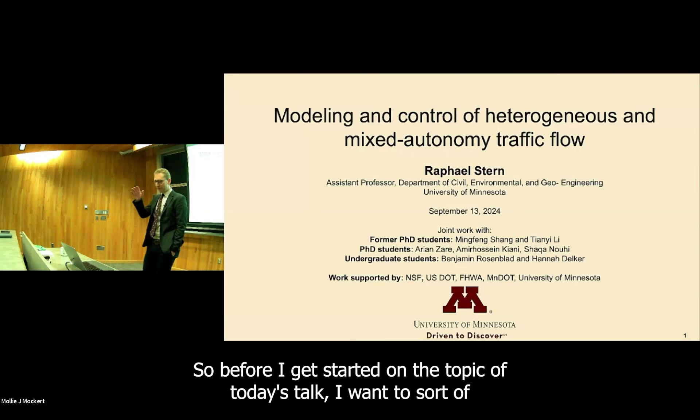Before I get started on the topic of today's talk, I want to place my work generally in a broader context. I'm going to talk about one of the projects I've been working on here at the University of Minnesota, but the work that I do all kind of revolves around this central question of how do you use data to inform the control and management of transportation systems. There's a whole bunch of new data sources coming online, and we can use these to better manage the transportation infrastructure that we have.

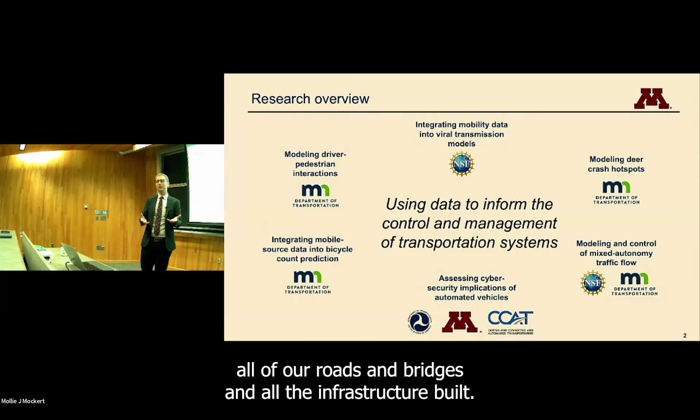A large part of my philosophy about this is we have spent decades and decades and billions of dollars building infrastructure, and saying something like automated vehicles is going to totally change the infrastructure that we need is unfortunate, because I just don't think it's going to happen if it requires us to rebuild all of our roads and bridges and all the infrastructure we've built. So a large part of the work that I do looks at what do we have, how do we take data to improve how we're managing what we have, and what maybe smaller updates do we need to make.

That includes work with vulnerable road users like bicyclists and pedestrians. During COVID, I got really interested in mobility data as a whole and how that influences viral spread modeling. A lot of stuff with deer, actually not that much stuff with deer, but people seem to be interested in it. And what I want to talk about today is what might happen when we have automated vehicles. I think we are both closer and further from having automated vehicles than you may think we are. I'll talk about what I mean by that.

So automated vehicles have had a lot of hype over the last several decades, more so in the last maybe decade or so. And there's a lot of different aspects of how automated vehicles might totally change the way we think about transportation. I want to talk about a couple of these - this is not what I want to talk about today, but I think it's important to at least set the stage and understand how automated vehicles have the potential to really transform the way we think about transportation and mobility.

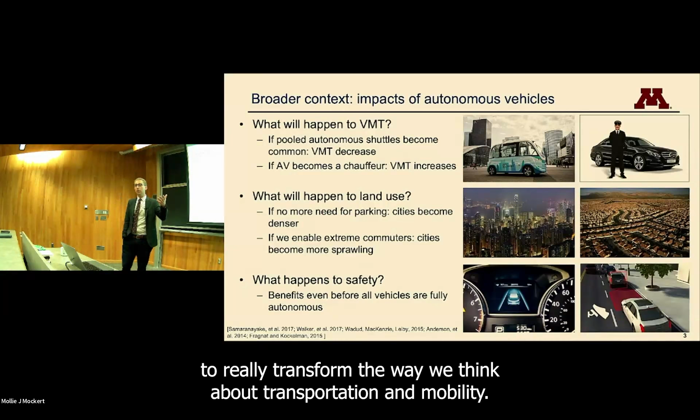The first question that's out there is what will happen to vehicle miles traveled? VMT is a commonly used metric that traffic engineers use to decide how to allocate resources in terms of road repair, road improvement, et cetera. And there's different scenarios that could play out depending on how automated vehicles are introduced.

On the one hand, there's a lot of work. We've seen some Warren lectures here presented on pooled automated shuttles. If I had driven this morning instead of biking, there were probably other people coming up from South Minneapolis at a similar time. We could have potentially pooled a ride, and if we didn't have to worry about a driver, a shared shuttle could pick us up and drop us both off here, taking what would have been 2 trips and reducing it to 1. That's a reduction of vehicle miles traveled.

The other way to think about an automated vehicle is it's effectively a chauffeur. So if at 11 o'clock at night you want to go get some food, you can just get in the automated vehicle and not worry about being sleepy. Actually, why even get in the car? Just have the car do the work, drive, come back, and now you might have ghost trips occurring without a human in the car. You effectively reduce the cost to travel and the cost of time, and you could see a big increase in vehicle miles traveled. Automated vehicles also have the potential to change how we think about land use.

University of Minnesota is an urban campus. Real estate here isn't super expensive, but it's reasonably expensive. If you look at a satellite photo of the campus, you'll notice huge parts of it are surface parking, used just to park cars. With automated vehicles, we could potentially reduce some of that because those cars might not need to park — they could drop you off at work or class and then go pick up someone else. We could use that land to build more dorms, more graduate student housing.

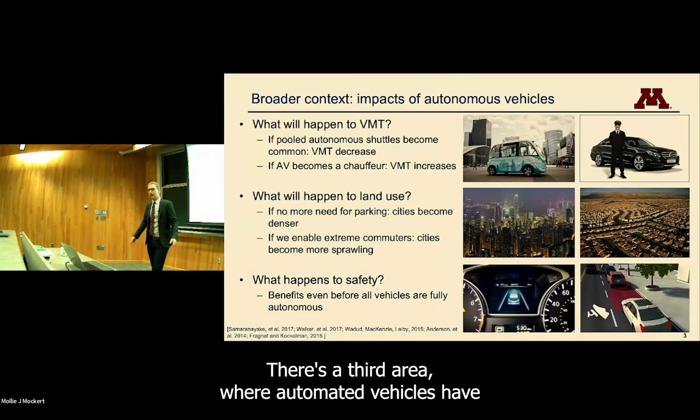There's a third area where automated vehicles have the potential to make real change, and that is safety. Again, there are different scenarios. If you look at the automated vehicles we have now, there are suggestions they might not actually be as reliable as human drivers right now, but there's also potential in the long run for them to be much more reliable, because humans text, humans drink and drive — automated vehicles don't do any of that.

Okay, so those are all the things I'm not going to talk about. But I think they're important to keep in mind because they really set the stage for the entire conversation about how vehicle automation can impact how we think about transportation.

What I want to think about is how increased vehicle autonomy will impact traffic flow. This is the topic I'm really passionate about, and it goes back to that central question that guides a lot of what I've done here. Things might be different — what does that mean for how we manage the infrastructure?

What I'm really interested in — I love traffic jams, I hate being in them, but I love them — is something called phantom traffic jams. These are real traffic jams that occur for no good reason, or no apparent reason, is probably the better way to put it.

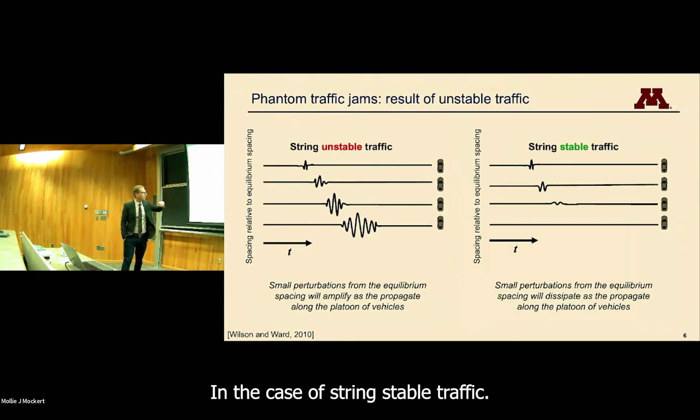Asymptotic stability might refer to what happens to that vehicle over time, but string stability refers to what happens to that perturbation. The vehicle behind it is going to have to hit the brakes too. The question of string stability is, does that perturbation amplify to subsequent vehicles, in the case of string unstable traffic, or does it dissipate to subsequent vehicles, in the case of string stable traffic? This is the key to whether or not you're going to have those instabilities, those phantom jams arise, is this string instability.

And you see these things sort of arise out of the blue. They grow, some of them split, they have a life of their own. Some of them merge, you can see some of them merge. They have really interesting dynamics of their own. It's sort of like looking at zebra stripes or something and trying to make sense of it. What's going on here? Okay, so this is what traffic looks like in the wild.

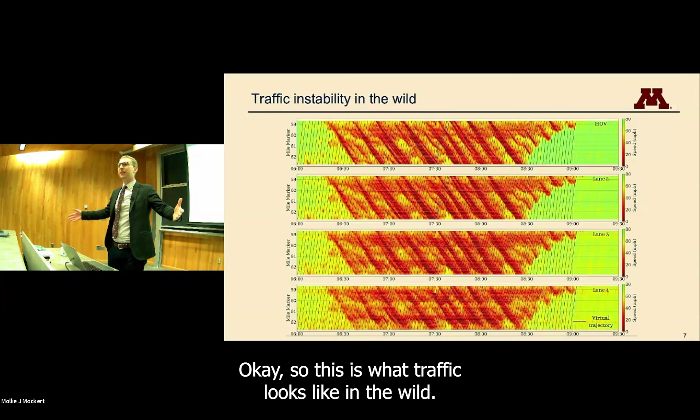When I spoke here, I think it was 6.5 years ago, I had a result I was super proud to present, and I want to show it now because I think it sets the stage for a lot of what I've done since. The question was, think back to that ring road experiment from Japan, 22 cars on a circular ring, they're all driving, chaos ensues. What happens if we start to have a small number of those vehicles where we can control how they drive? That's the central question here. Imagine you can make some of those vehicles drive better.

Now at this point, we've activated the autonomous controller on that car. That car drives differently. The drivers in the other cars have no idea what's going on, but that one car driving better forces everyone else to drive better, which is kind of cool, right? Think about what you could do if you drove better.

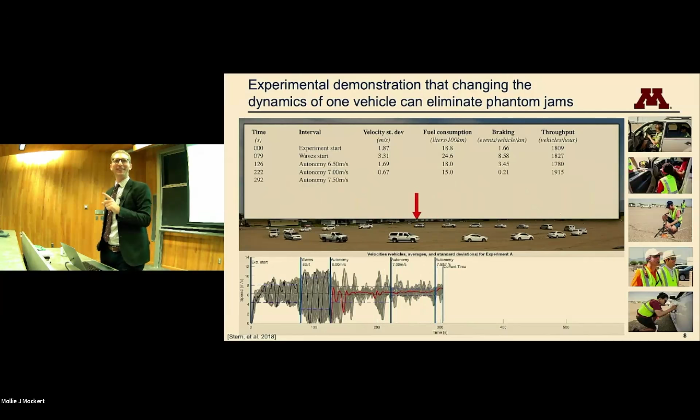When you see something like that, that's a wave, that's a slowdown. You can see really nicely at the beginning, we have these stop and go waves, these phantom jams that arise. There's no bottleneck there, right? Those are just straight up phantom jams. But relatively quickly, we activate the controller and we see smooth traffic.

We measured data off each vehicle. We saw a huge reduction in fuel consumption, a slight increase in throughput, because instead of slowing and speeding up, we see maybe a 15% or so increase in throughput. Okay, so that was the result that I was super excited to share.

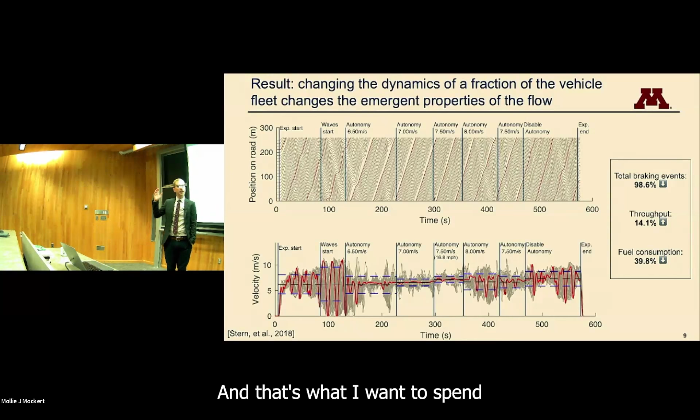The question is, how realistic is this? And that's what I want to spend the rest of today talking about, is can we actually do this? And there's an important thing that we need to all be on the same page about, and that is that not all automated vehicles are the same.

There's different levels of automation, and each level of automation means a different thing. So the Society of Automotive Engineers defines 5 different levels of automation. I guess 6, because there's level 0, no automation. That's what I personally drive.

So in no automation, who's steering and accelerating? That's the human driver. Monitoring the environment, that's the human driver. If something goes wrong, the human driver needs to slam on the brakes or veer to avoid a crash. There's no robot on the car.

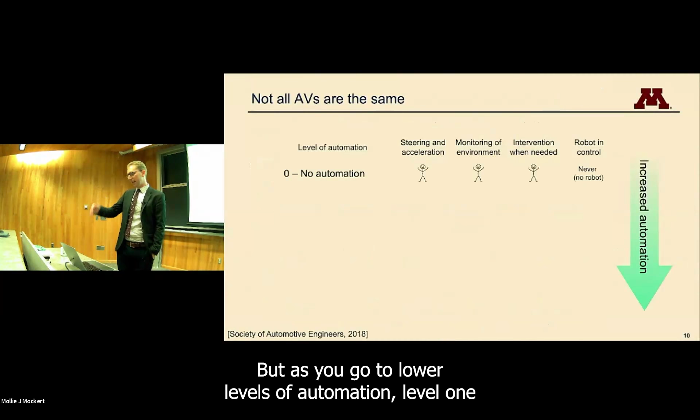But as you go to lower levels of automation, level 1, driver assistance, these are features that you might be familiar with. We start to take some of those driving tasks from the vehicle and hand them off, take them from the human and hand them off to the vehicle.

And as we go up to higher levels of automation, level 2 partial automation, conditional automation, high automation, and finally up to level 5 full automation, we're seeing more and more of these driving tasks in more and more driving contexts. Some of these might only be on pre-mapped freeways, whereas being able to do this in all driving domains are handed over from the driver to the car.

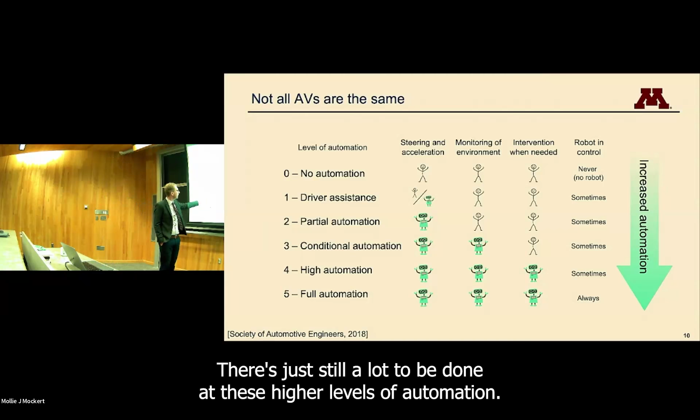And so those results that I showed, they might be feasible if we're somewhere here, right? 3, 4, maybe 5. The reality is, what we've got, at least for the foreseeable future... I mean, a few months ago, every week, another autonomous car company went bankrupt. There's just still a lot to be done at these higher levels of automation. What we have for the foreseeable future is these lower levels of automation.

So I want to start there. One feature that I'm particularly interested in, because it does exactly what we want it to do in terms of controlling the flow of traffic, is it changes the way that individual vehicles drive, and that's adaptive cruise control. Remember back to that video on the ring, what we really saw there was if you change the way a small number of vehicles drive, you change the way the whole flow behaves. You change the emergent properties of the dynamics of that whole traffic flow.

And adaptive cruise control used to be a luxury feature, but now most new cars have it. Many new cars have it. I dare say most new cars have it.

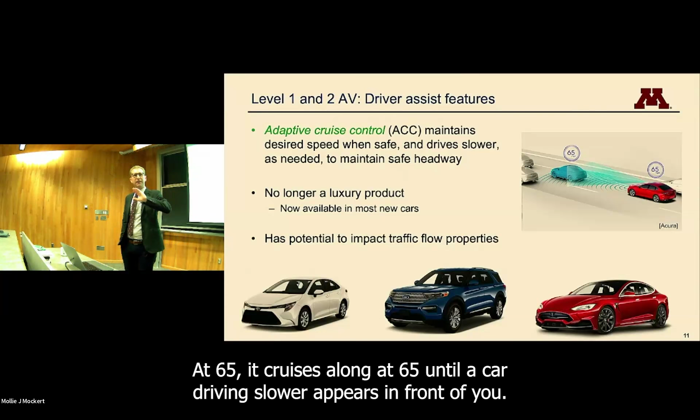What it is, it's like a traditional cruise control, but it uses a radar to also maintain a safe spacing. So you want to drive at 65 miles per hour, you set your adaptive cruise control at 65. It cruises along at 65 until a car driving slower appears in front of you. It'll slow down to avoid a collision. And then as soon as that car changes lanes or speeds up, your adaptive cruise controller will speed back up.

That is exactly what we want, right? We want to be able to control something like that. Now, if you look at the literature and you ask, okay, but are these things string stable? There's literature going back to from before I was born, right around when I was born, early 90s, that says a resounding yes. Adaptive cruise controllers can be string stable, end of story.

But it turns out that if you actually look at the way these systems work, this is in theory, but in practice there's a slightly different story. That's what I want to investigate right now. This is some work that I did early on while I was here.

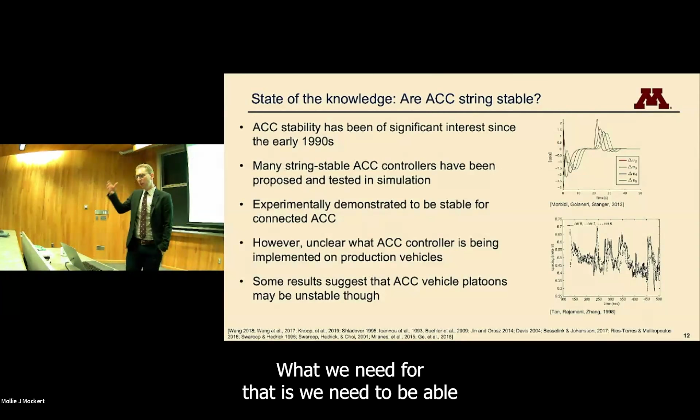So in order to analyze what these systems look like with respect to string stability, we first need to be able to characterize the string stability of a driving system. What we need is to represent that system somehow. I'm going to use something called car following models, or microscopic models. These are ordinary differential equations that describe the acceleration of a vehicle as a function of the spacing with respect to the vehicle in front, the speed it's traveling at, and the relative speed between the two vehicles. This is a common assumption made back to the mid-50s with some of the first car following models out of GM, describing the dynamics of a vehicle as an ODE with this state.

So if we have one of these, the question of string stability is: a platoon of these vehicles, or a group of them driving at equilibrium, what happens to small perturbations? We have that same equilibrium as before, zero acceleration, same speed, same spacing, and we introduce a small perturbation. The question is what happens to that perturbation through the dynamics. So we can couple these ODEs and watch what happens.

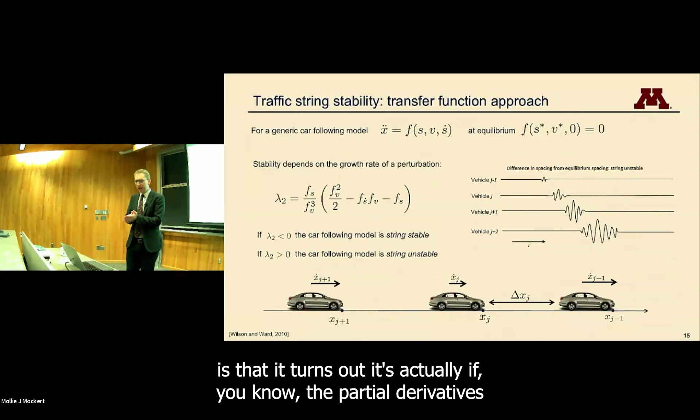The key result I want to get to is that if you know the partial derivatives of the car following model, that ordinary differential equation, you can easily characterize whether or not that vehicle is string stable. You come up with this lambda 2 - happy to go into details on what that is, it's the curvature of the Bode plot. The important thing is it depends only on the partial derivatives of the model, so if you know your model, it's calculus, but you can easily derive those partial derivatives and get your lambda 2.

If lambda 2 is less than 0, we're going to see dissipating behavior - that's a string stable vehicle, it tends to smooth traffic waves. If lambda 2 is greater than 0, it's string unstable, and it tends to amplify those waves.

Okay, so now we have a model, and we have a tool to analyze that model. What we need is data, and I think this is what Dr. Davis was getting at before - we need to collect data. The goal here is to observe what these vehicles behave like.

Now you might say, hey, car companies built that, they know how it behaves. So two things. First, they're never going to tell me - I tried, they won't tell me. Second, and perhaps more importantly, they know how they think they built it.

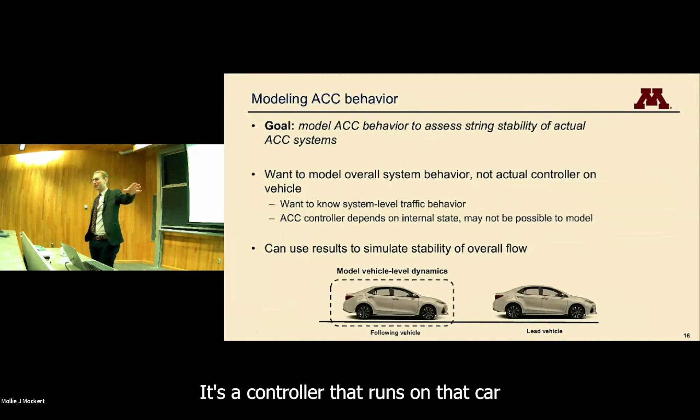They have some relatively straightforward controller - for anyone who knows something about controls, it's a PID controller that runs on the car, and then runs through this highly nonlinear system, which includes a gearbox, transmission, an engine, all sorts of different components. Add to that all sorts of different external variables, such as wind speed, even things like air temperature and humidity affect how that engine behaves. So you'd need a thousand-dimensional model to accurately assess this, and you'd need the knowledge from the car company, which again, they're not going to give you.

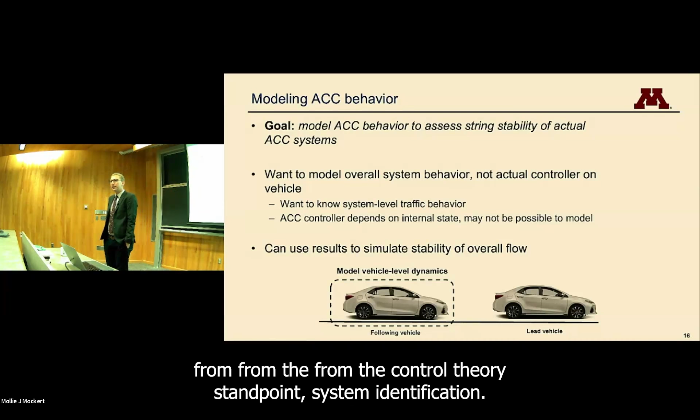So what I want to do is think of this more as a system identification problem - sort of think of it from the control theory standpoint. I want to see: I give this an input, this car in front of it brakes, how does this respond? I want to build this as a black box in the form of those car following models, because I just spent three minutes telling you how I can nicely analyze those models for string stability. So the model I'm going to use is pretty straightforward.

I'll talk in more detail about variants of this and variations we've developed here, but the basic model I want to use is an optimal velocity, relative velocity model.

There's two terms to this model. The first term is, who here learned the 2-second rule in driver's ed? This is follow the tau second rule: stay tau seconds behind the vehicle in front of you. So if you're going faster, increase that spacing.

The second term is sort of a relaxation toward the leader velocity. If the vehicle in front of you starts to brake, you don't want to overshoot. You want to be slightly more reactive.

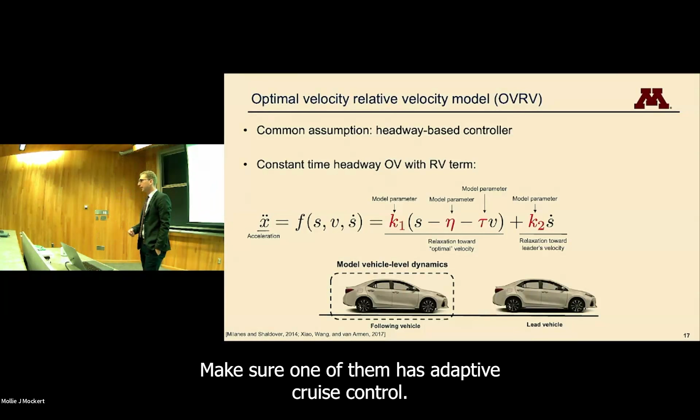The experimental setup here is really pretty simple. Get two cars, make sure one of them has adaptive cruise control, get high accuracy GPS sensors, mount those on each car, drive, have the vehicle in front brake, the vehicle in back follows with ACC on, record the signal for each of those. You get the spacing, you get the speed of each, you get the relative speed, and you're in business. Did this with a whole bunch of different cars, just to give you a sense of what some of this looks like.

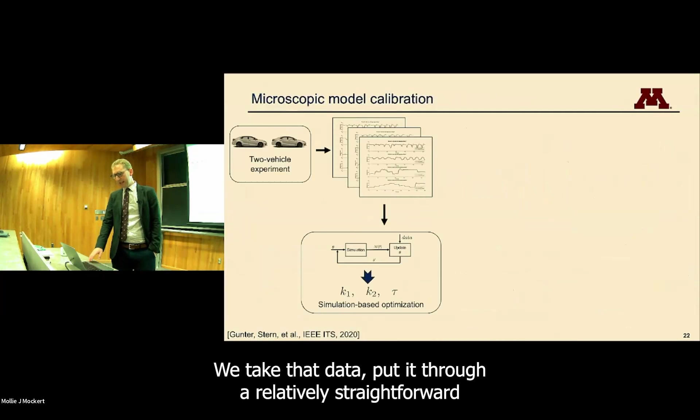So in summary, we've got a 2-vehicle experiment that gives us data. We take that data, put it through a relatively straightforward optimization routine to find the best fit model parameters that make that model I showed you, remember that 2-second rule or tau second rule model, look like each of those vehicles, each of those 7 vehicles.

We get values, we test them. Most of these cars, if you have one of these systems, you'll know that there's generally a close following spacing and different user settings. Some cars have 2 settings, I've seen some cars have 7 settings. I don't know who needs that much specificity in terms of how far they follow, but some cars offer that.

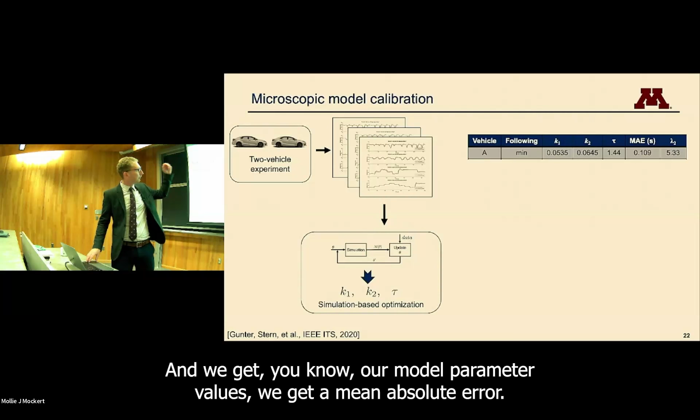We tested at the minimum and the maximum, and we get our model parameter values. We get a mean absolute error, this is a headway mean absolute error. So if the vehicle is trying to follow 2 seconds behind, we're off by 1/10 of a second.

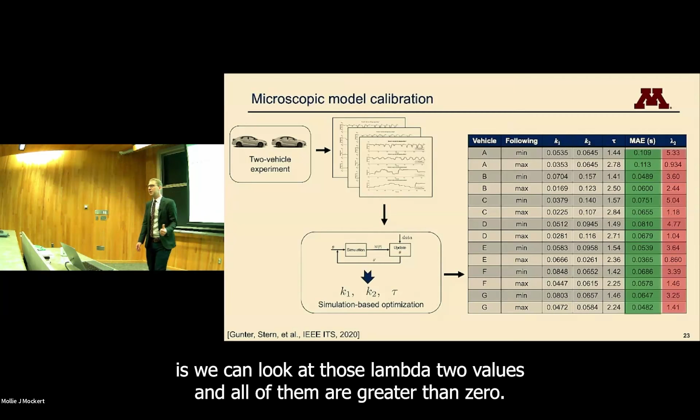We can do this for all 7 vehicles, both the minimum and the maximum setting. There's 2 things I want to point out. The first is we're seeing on the order of a 1/10 to a 20th of a second error in headway, in time gap, between the model and the data. I think that's pretty good. The second thing is we can look at those lambda2 values, and all of them are greater than 0. So what this means from a traffic flow perspective is all of these are going to amplify traffic waves.

I did start, like 10 or 12 minutes ago, by saying humans do this. So I think the next logical question is, okay, but are they worse than humans? How do they compare to humans? I had a student, Mingfeng Shang, who's now at the University of Arizona, recently graduated, who spent a large part of his work looking at exactly this question. We have these models, we spent a lot of time building models for these, we have a lot of data, but how do they compare to human drivers?

What I want to share is just one of these results that I think nicely illustrates how these vehicles might differ from, relate to, or compare to human drivers. So I want to test 2 different scenarios: one of these commercially available internal combustion engine ACC vehicles. If you know anything about car models, you might be able to guess what this car was, this is one of the models that we spent a lot of time tuning and building. And a theoretical vehicle that's going to drive very similar to that vehicle I showed at the beginning.

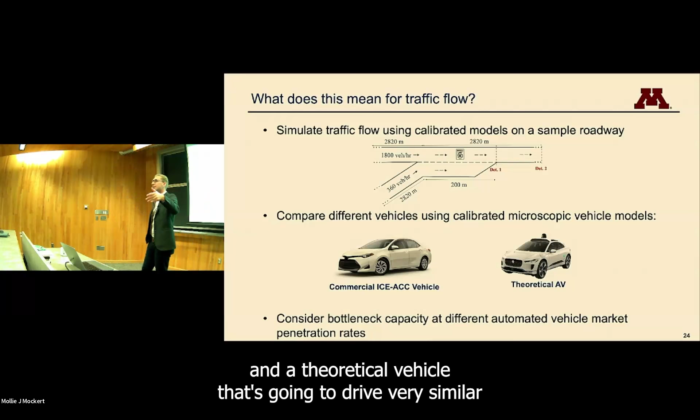The result for this, we ought to know, because I just showed you the video. It ought to be, I don't know, a 10 to 20% increase in throughput. But we're going to look at a merge bottleneck, and I want to point out—it's hard to see—but that's kilometers per hour, not miles per hour, 90 kilometers per hour. That's an important detail.

We're going to look at a merge bottleneck, a common bottleneck that you might see, and we're going to look at different market penetration rates, or different percentages of traffic being commercially available ACC vehicles as opposed to 100% human-driven. We're going to reduce from 100% human-driven to 90%, 80%, etc., as well as theoretical AVs.

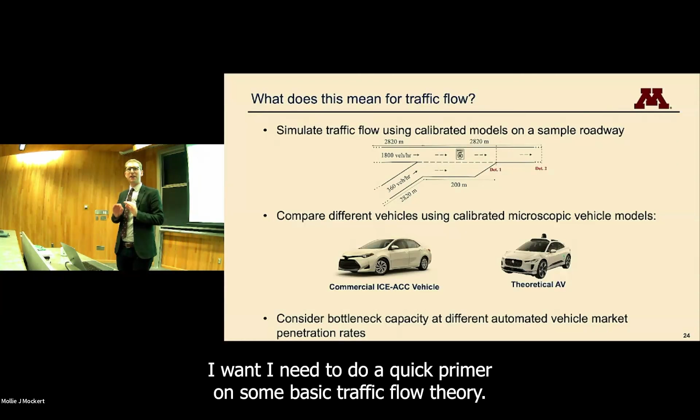Before I show the results, I need to do a quick primer on some basic traffic flow theory. If you're in fluid mechanics, you might see some overlap here in terms of how we think about this.

Let's go back to 1935, Bruce Greenshields. There he is, professor at Ohio State University—apologies. He had this idea that the speed of traffic ought to depend on the number of vehicles on the road, or the density of vehicles on the road. He had a hunch, I would say. He went out and collected data.

This is him collecting data here. He had two cameras set up that took pictures when vehicles passed so he could see what the speed of the vehicle was, and then he was able to count the number of vehicles and look at the density. This was 1935—automobiles were pretty rare.

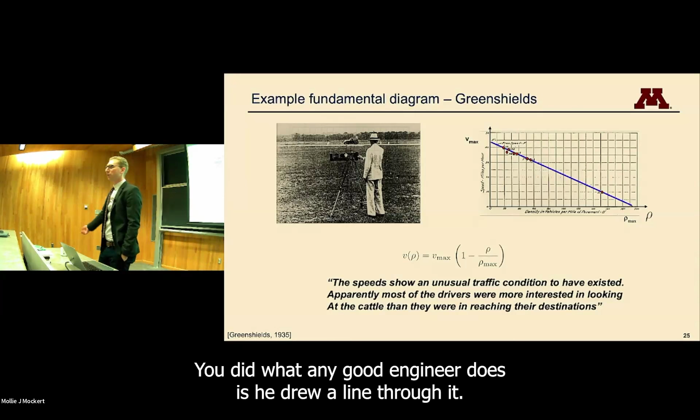So he got a whole bunch of data on the upper left-hand side there at low densities in terms of vehicles per mile, but relatively high speed. He got one data point all the way down here at a high density, low speed. He did what any good engineer does—he drew a line through it. This is called the Greenshields diagram, and it's this sort of linear decreasing relationship between spacing and speed.

One of the important relationships in traffic flow is that if you know the speed and you know the spacing, you also know the flow. Speed is miles per hour, spacing—or rather density—is vehicles per mile. If you know miles per hour and vehicles per mile, and do the dimensional analysis, you'll see that we can get vehicles per hour. Ultimately, as traffic engineers, that is a metric we care about a lot, because that's how many people we can get across our infrastructure in any given hour of the day.

So this linear relationship, you multiply that through by speed again, and you're going to get a quadratic flow-density relationship. In traffic engineering, we call this our fundamental diagram—it's that important to us. I was at a conference with a lot of applied mathematicians, and one of them said, my colleagues in applied math think it's so cool that in transportation engineering, you have something so important you call it your fundamental diagram. So, and everyone knows this is the fundamental diagram.

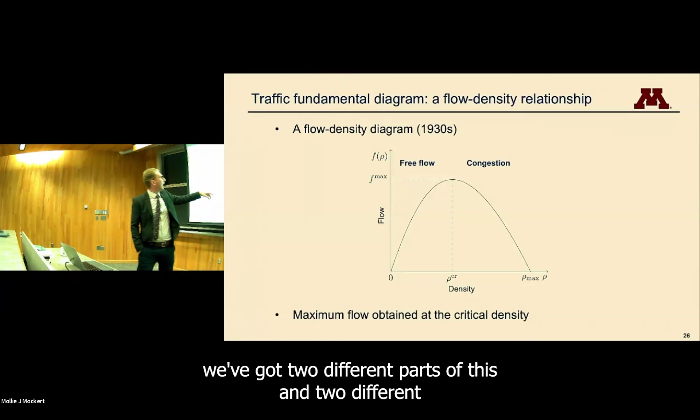Okay, so if you look at data, assuming that linear relationship between speed and spacing, we've got two different parts here and a couple of important numbers. On the left-hand side, right here in the middle, we've got this critical density—that's the density at which congestion starts to show up. On the left-hand side we have free flow, on the right-hand side we have congestion. At the top, the maximum sustained flow—that's our capacity.

Obviously, if you are a transportation engineer, you want two things: you want that capacity to be high, and you want this critical density, this breakdown point, to be as far to the right as possible. Because that means you can sustain traffic at high densities that's flowing smoothly, and you can get a lot of vehicles across your infrastructure.

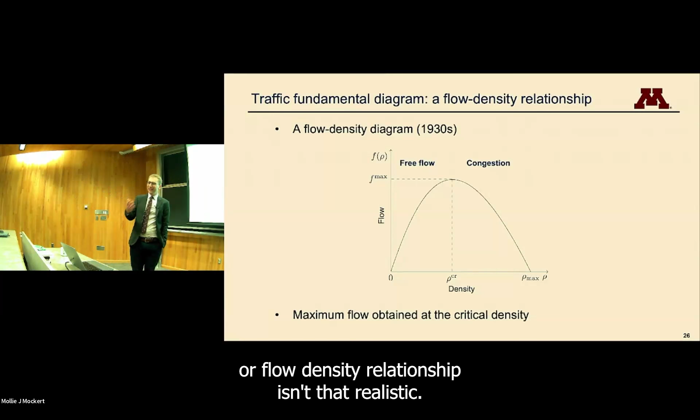If you look at data, it turns out that while it's mathematically quite nice, this parabolic fundamental diagram, or flow-density relationship, isn't that realistic. Something that's triangular—generally a lopsided triangle—is more consistent with the data. But the fundamentals are the same—shouldn't use the word fundamentals—the concepts are the same.

We have that free flow and congestion. Okay, so now I can show you the results. First, let's look at the fully automated vehicle.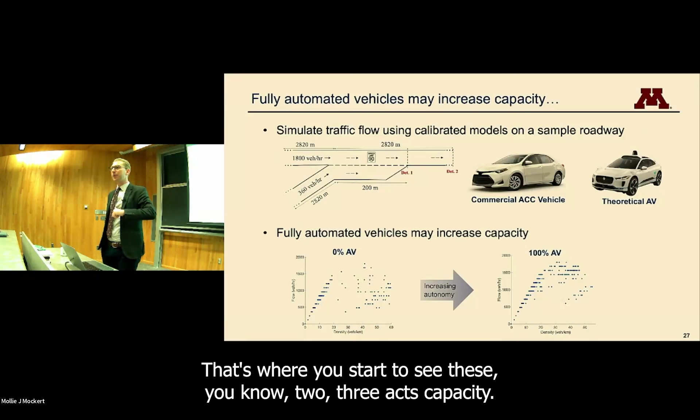If you add in connectivity, that's something I'm not talking about today - that's where you start to see 2x, 3x capacity. But if you're not relying on connectivity, you're not going to get more than maybe 15 or 20% more. But you can potentially get that 15 or 20% more just by smoothing out that flow.

Okay, so that's fully automated vehicles. With ACC, I want to use some of those models my student built to look at what happens. So here is our fully human, 0% ACC, showing these fundamental diagrams for subsequently more and more ACC traffic. What you see is two things: you see kind of a collapse of that fundamental diagram, you see that critical density, that breakdown point, moves to the left, and you see that capacity comes down.

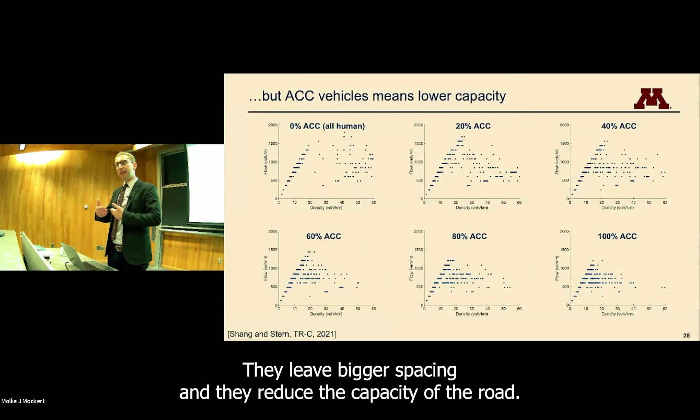So potentially these things are overreactive - we saw that a few minutes ago. They're conservative, they leave bigger spacing, and they reduce the capacity of the road. Potentially up to 30, 35% reduction in capacity. So if you're a traffic engineer and you have a 6-lane freeway, if everyone turns on ACC, you may have a 5-lane freeway.

That might matter, right? There's a little bit of good news for those of you who drive electric vehicles. I've recently started collecting some data on electric vehicles, and not to get too far into the details of the powertrains, they have full torque at low speeds, which is what makes electric vehicles so much fun to drive - you hit the gas and you go.

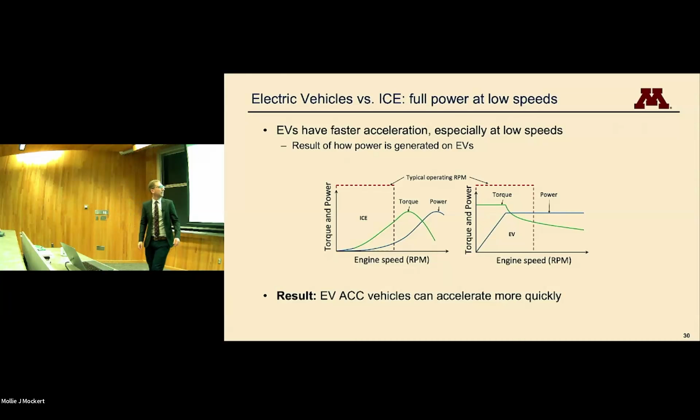It also means that a lot of that nonlinearity I was talking about, between that string stable controller someone designed in the early 90s and what happens when the tires literally go across the pavement, is a lot simpler. So if you look at some of this data, I've been collecting data for a couple of electric vehicles.

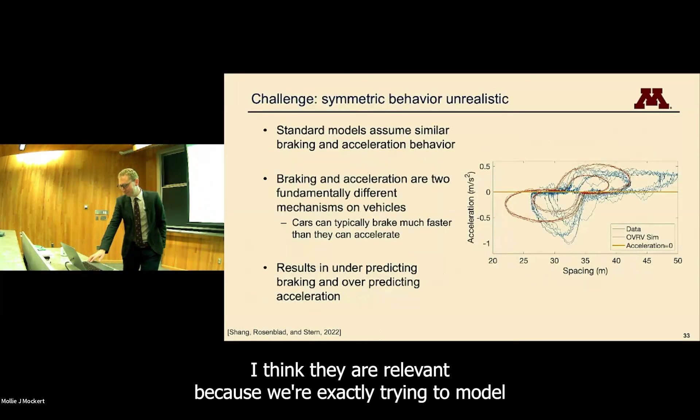You don't see that overshoot, and you see actually a little bit of what I'll call jam absorption. These vehicles have very different braking and acceleration behavior. So if you look at spacing versus acceleration, you see lopsided behavior. The simpler models out there just don't capture that. You might say, oh, these are details, I'm not sure if they really matter - but I think they're relevant because we're exactly trying to model this very specific acceleration and braking behavior.

So my student and I built a new model that incorporates some of that asymmetry. There's some nice analysis that can be done to show under what conditions this is string stable. It's now a discontinuous system, or a hybrid system - a lot more complicated to analyze, but it captures the dynamics of those vehicles a lot better.

If you start to look at simulations of groups of these vehicles driving, you can see that. So that lead vehicle is from actual data, braking, an electric vehicle following with data, braking, and then simulated. And you see that there might be a less congested future as we see more automated or more electric, partially automated vehicles.

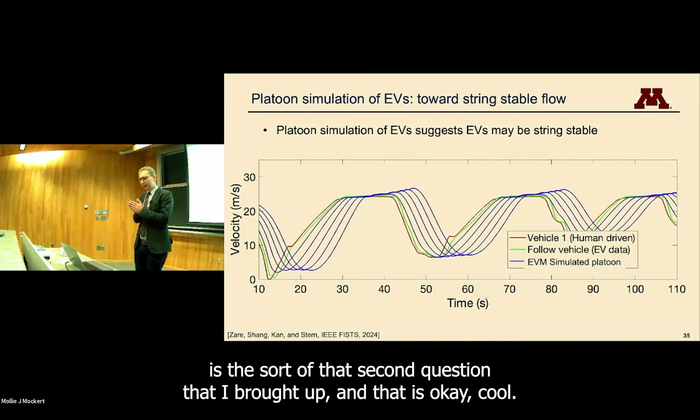Okay, so that's the first part of what I want to talk about. The second part is that second question I brought up: so we're seeing potentially very different traffic flow. Changing the dynamics of traffic, of individual constituents of the flow, changes the flow. If I'm a traffic engineer managing a piece of infrastructure, what do I do with this information?

So I want to introduce a vision for how we might be able to manage traffic in the future that looks at who's showed up to drive today, what percentage of vehicles are automated, what are their specific characteristics. What does that mean? That requires us to identify who's there, what that means in terms of what that aggregate flow is, what are the emergent properties of that aggregate flow, what are those flow dynamics. And then how do we take the existing control and update it?

Hopefully the answer is not that everyone needs to buy a certain car or have some device installed, but something like we can take the ramp meter and change it a little bit to be responsive to the current market penetration rate, the current fraction of vehicles driving differently. Let's say they're ACC, driving maybe a little more conservatively.

So I want to step through the work I've done on each of these. I'll go relatively fast on some of them because there are just key results I want to share, and I'll go into more detail on others because I think there's some nice methodological work that can be done there.

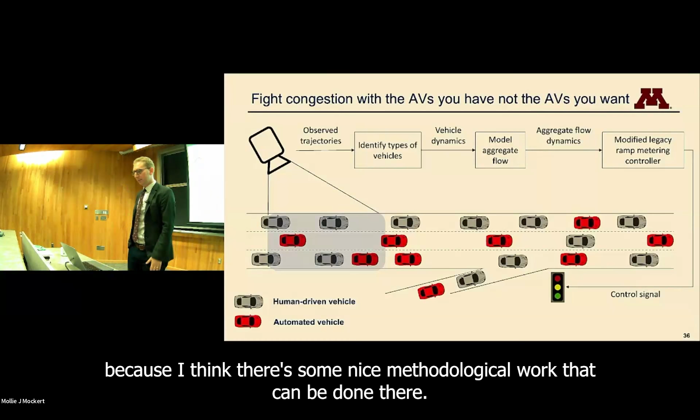The first thing is the identification of vehicles. What we really want to do is watch a vehicle drive and be able to identify almost like a unique driving signature. What is this vehicle's behavior? What is its dynamical response to a certain stimulus or input?

Now, of course, we can't control what that input is. We're just watching traffic, so we have to hope it brakes at some point and that we see what it's braking in response to, because otherwise, if it's just driving at 60 miles an hour without any change, we're not going to be able to observe that.

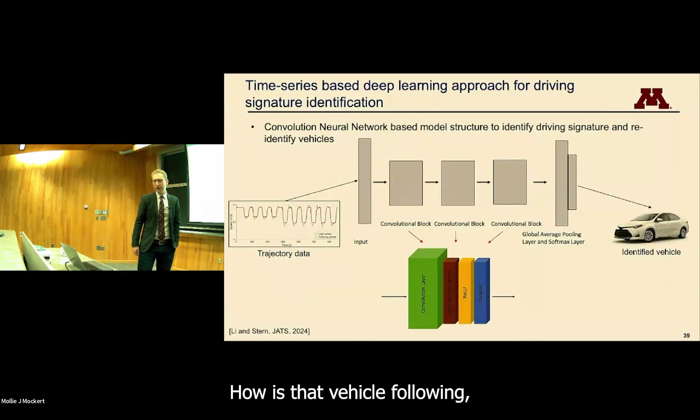One of the technologies that's become pretty pervasive is cameras, so we have relatively good data of vehicles driving and following other vehicles. I think Professor Choi talked about this in the spring, about what you can do with this type of vehicle video data. So my student Tianyi Li and I came up with a pipeline for looking at vehicles, the leader vehicle and the following vehicle, how that vehicle is following, and then taking that and putting it through a neural net to identify what vehicle it is.

With the time I have left, I'm not going to go into all the painstaking details of how this works, but the results are quite nice. In about 85% of the cases, we can look at a car, look at it driving a little later on, and re-identify that same vehicle based on the way it's braking.

This only works with a very small set of vehicles right now. We can't do it in the general public. If we know there are 5 different cars driving, we can identify 1, 2, 3, 4, 5, but I can't re-identify that in the general public. That is a much harder problem. But this is a step in the right direction - we are starting to get to the point where we can look at a vehicle, see it drive, and then re-identify it.

So now if we know who's there, it's a bit of a jump, but bear with me. The next question is, how do they influence the entire properties of that flow? That's what I want to talk about next - how do we take the vehicles who showed up to drive today and get the flow dynamics?

What we've been talking about so far is microscopic or vehicle level dynamics. When we talked about the fundamental diagram, we were talking about macroscopic or flow level dynamics. So we need to go from those microscopic vehicle level dynamics - we know 20% of vehicles are ACC, 80% are human drivers - to what that fundamental diagram is going to look like, because that is what we're ultimately going to use for control.

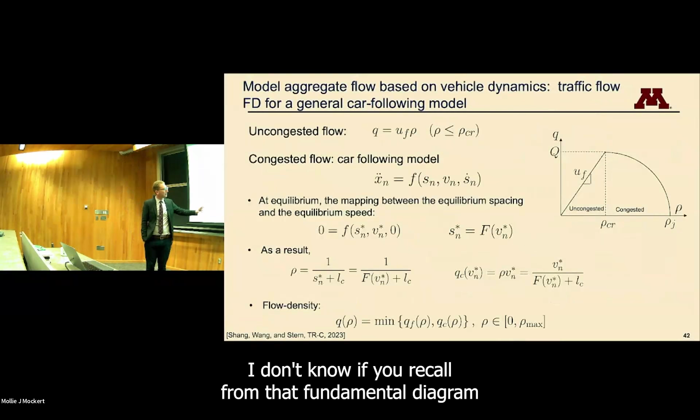The basics behind this idea: in an uncongested flow, we assume vehicles are traveling at free flow, and that's pretty consistent with the data. If you recall from the fundamental diagram I showed earlier, in the clustered area of the Greenshields plot, those points were close together.

In congestion, this is where things get more interesting. We assume one of those microscopic car-following models, starting at the vehicle level. If they're at equilibrium, which these fundamental diagrams are equilibrium curves, we have a speed-spacing relationship. If we know the car-following model, we can derive that speed-spacing relationship. It's algebra, not fun for some of the more complicated models, but generally doable.

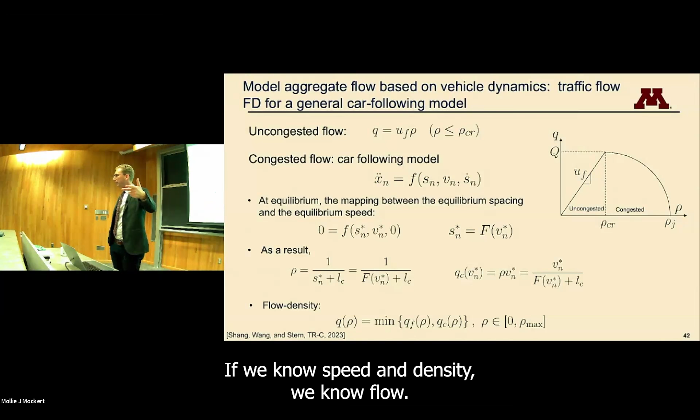If we know spacing, the reciprocal of spacing is density, so now we know density. If we know speed and density, we know flow. This is a pretty standard exercise that students in my more advanced classes have done.

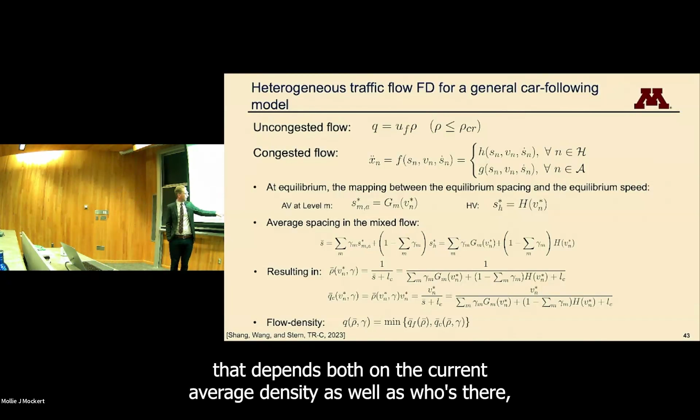Where it gets interesting is when you have a whole bunch of different vehicles that drive differently—different classes of vehicles. We follow the same approach, but now we have to come up with an average equivalent spacing based on gamma, the market penetration rate, or fraction of vehicles in each class. You can do this for two cases or n cases, and come up with a flow-density relationship that depends both on the current average density and on who's there—the market penetration rate of automated vehicles, ACC vehicles, etc.

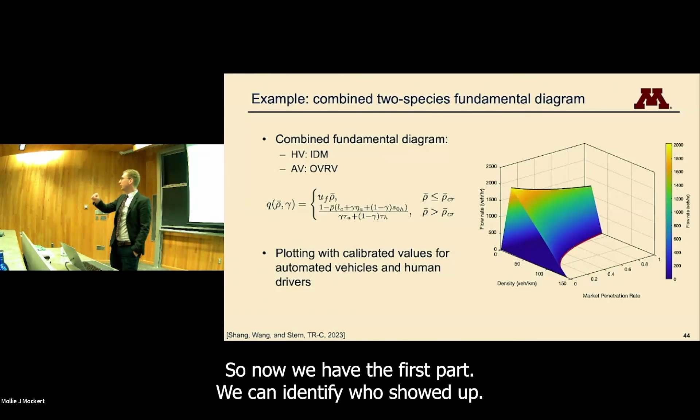So now we have the first part—we can identify who showed up. We have the second part—we know, based on who showed up, what the traffic's going to look like. The last thing to show you is the third part: how do we change the way we control or manage our infrastructure?

As an example, you could do this with any infrastructure control technique where you look at density and change something in response. I'll show you ramp metering, because here in the Twin Cities we are a leader in ramp metering, at least in the United States.

All of the results that say ramp metering works come from a single experiment—well, not quite true, but many come from an experiment done here in the Twin Cities, I think in the early 2000s, when they shut off all the ramp meters because people were fed up with them. Congestion increased quite a bit during the two weeks the ramp meters were off.

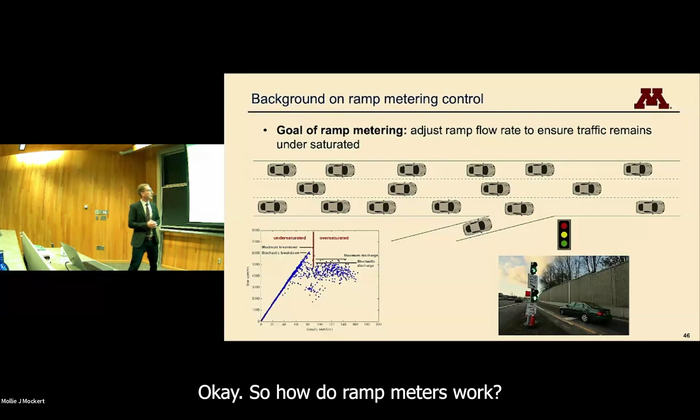So how do ramp meters work? The simple idea is it's a traffic light at the entrance to the ramp, controlling the flow rate. You can't control the flow rate on the main line, but it's like a spigot—you control how much you add. The goal in traffic engineering is straightforward: avoid getting into the congested region. You look at what's on the main line, see what's left over, and allow as much flow as that leftover amount.

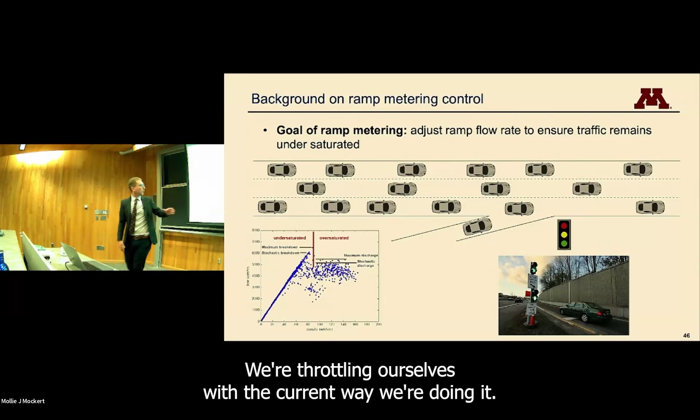What I told you is that the way this is going to look is probably going to change. If this collapses, we might still allow this much in, but that puts us well into the congested region on a new fundamental diagram. Or, just as bad, we get those new automated vehicles that grow that fundamental diagram, and we end up throttling ourselves with the current way we're doing it. So we really need to be responsive to who's there, because who shows up to drive determines how that flow looks. That's the main idea.

To do this, instead of microscopic models, we're going to use a macroscopic model, basically a first order partial differential equation describing the flow of fluid. Specifically, we'll use a discretization of this, which splits the road into individual cells. We look at a discrete density in each cell and its average speed, and evolve that by looking at who flows from each cell into the next. It's called the cell transmission model, a commonly used discrete solver for PDEs, and it works really well for our purposes.

We need to adapt that for multiple classes of vehicles. The way I want to do this is to track each vehicle class independently. However, the number of vehicles that can flow from one cell to the other depends not just on how many vehicles of that class, so it doesn't just matter how many AVs or ACC vehicles are downstream, but also how many other vehicles are in there. So there's a little bookkeeping, a little algebra, but we can update this one-class cell transmission model to a multi-class cell transmission model. If you're familiar with discrete solvers, this is probably not that tough an exercise, but it's nice.

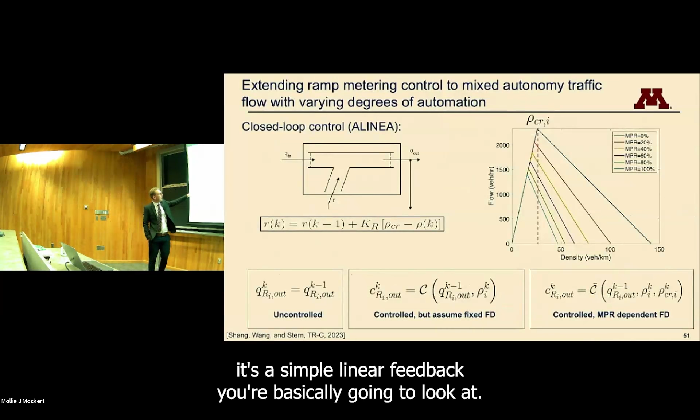Then we can run this ramp metering control. The ramp metering control I want to use is a simple feedback controller called ALINEA, a simple linear feedback. You look at how many vehicles you let out before, then look at the difference between your critical density, how many vehicles you could have on that road, and your current density, how many vehicles are currently there, and allow some fraction of that difference onto the road. So the lower the density on the main line, the bigger that difference, the more vehicles you'll let on from the ramp.

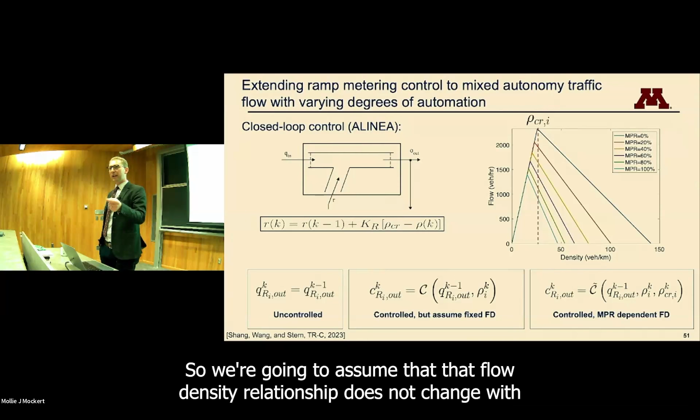I'm going to consider three different cases. The first is uncontrolled, just free flow. The second is what we're doing today: controlled, but assuming a fixed fundamental diagram, so we assume that flow-density relationship does not change with the percentage of automated vehicles. The third uses our estimate of what those flow conditions ought to be, taking into account the fraction of vehicles with different properties.

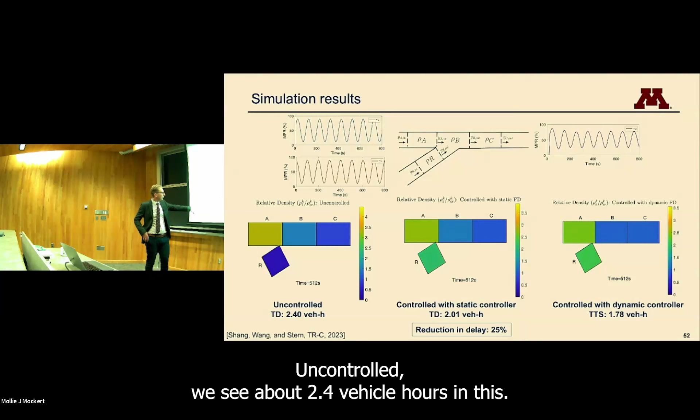What I want to show is a simulation result, with results at the bottom. We're looking at total delay, among a couple other metrics we could look at. That's the difference between how long it would have taken a vehicle to traverse without the control versus with the control, or rather, if it were free flow versus with that current control. Uncontrolled, we see about 2.4 vehicle hours in this, I think about a 600-second simulation, no, a little longer.

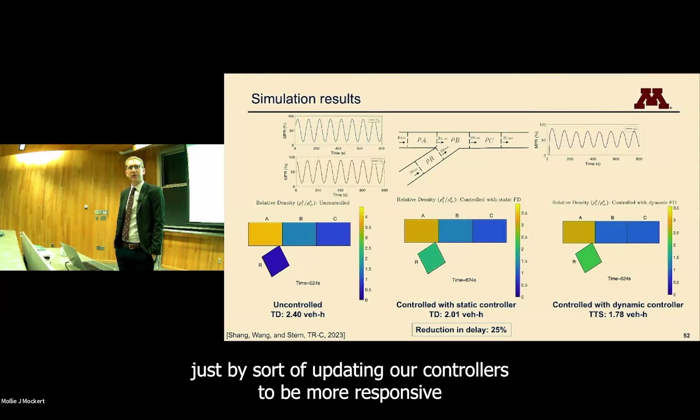If we control with a static fundamental diagram, we avoid some of that congestion, but we're still pumping slightly too many vehicles into that road because we're not taking into consideration that these ACC vehicles showing up to drive have different flow-density properties. Whereas if we dynamically update our controller, we reduce our total delay by about 25%. This is pretty nice. We're able to significantly reduce the total delay just by updating our controllers to be more responsive to what's going on the roads.

One last quick aside: I've talked about automated vehicles, but you could replace the word automated with aggressive vehicle for my entire talk, and I think everything would still be true.

There's heterogeneity in how we drive. Every single one of us drives differently from others. In fact, I drive differently in the morning than I do in the afternoon, and I drive differently when I'm running late to something than when I'm not, right? And when we look at these macroscopic models, we sort of average all of that out, and we see a lot of scatter, and we're comfortable with it. But really, each vehicle is sort of locally affecting the dynamics of the flow. And if you're a really obstinate or a really bad driver, you are going to change the way things flow.

So you don't necessarily need this to be in response to automation. This could be in response to different types of drivers, different flavors of driving, et cetera.

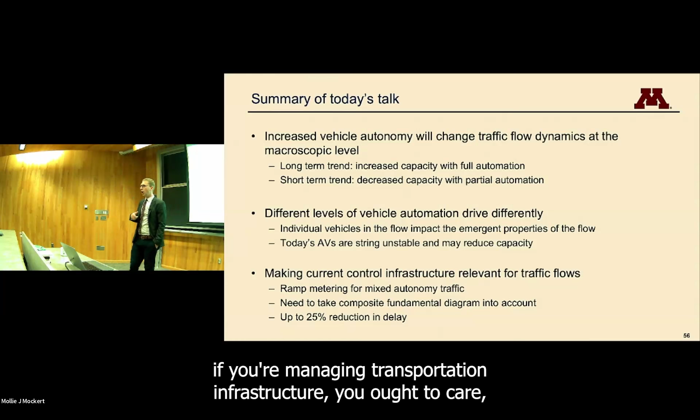What I outlined was a roadmap or an outline or framework for how we could use this information to slightly change our legacy infrastructure and hopefully make that infrastructure future-proof, or at least more relevant into the future. I think we have a little bit of time for questions if there are any.

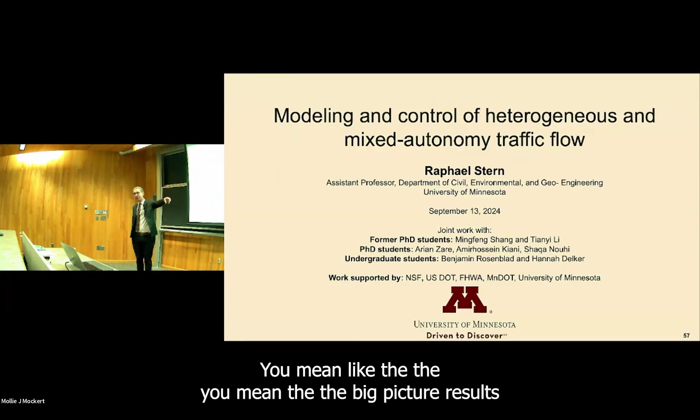So you have these models for your cars. I'm assuming they would be different cars, different models, different tire pressure, different models. So I was curious how robust your results are to model error. Yeah, that's a really good question. You mean like the big picture results at the end, or the microscopic vehicle models for like ACC vehicles, or all of the above? Yeah, that's a great question.

Okay, so we do some sensitivity analysis. Obviously, the downstream result of like expecting to see a 35% decrease in capacity changes depending on what those models look like. I mean, what I've shown is kind of simplistic. We're assuming there's two types of vehicles: all humans drive one way, all automated vehicles drive another way. But what you can do is you can look at calibrating models on a lot of different humans, for example, and we've done this. It's difficult because there's not that much data of this sort.

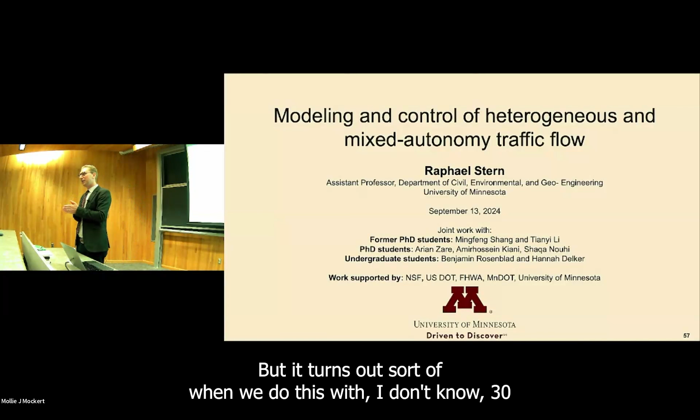We're trying to get access to that one data set that I showed at the beginning with that really nice traffic jam in Nashville, because that would be exactly what we need. But it turns out when we do this with, I don't know, 30 different drivers, 25 different drivers, and we look at the variability, there is variability in those models, but generally that variability is smaller than the downstream effect. So yes, that should be given with error bars that are maybe, let's say, 25 to 45 or something, but it's still a decrease. Does that answer your question?

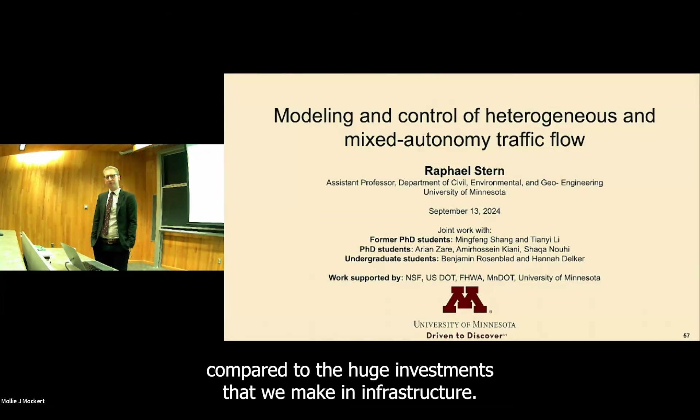Financial implications. So if you think about balancing the idea that maybe we could jam more cars on the road and they would go faster if we all drove AVs, compared to the huge investments that we make in infrastructure, can a case be made for adding more rebates for AVs, moving some of that money from infrastructure to AV?

Yeah, that's a really good question, because it gets at the heart of what's important, and that is sort of like the budget on these things.

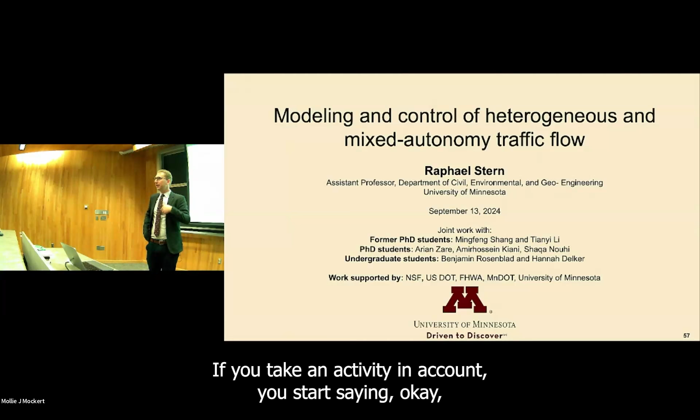If you take connectivity into account, you can bring in connectivity and get even better results. Some estimates say maybe 2 to 3 times capacity.

The thing is, we already have ways to do that. It's called bring a friend along. My car has 5 seats, it's normally just me. I could explode the capacity of a road if I just took people along.

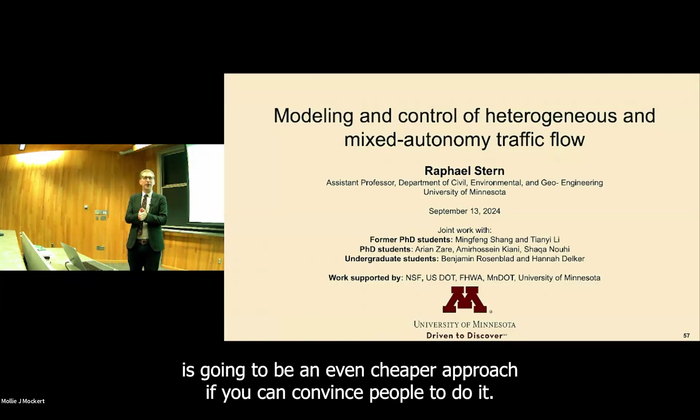So yes, absolutely you could - I haven't done that analysis of what the financial implications are, and what's the value of an individual AV from a capacity standpoint, because it saves us having to - importantly with ACC turned on. If you don't drive with ACC turned on, I have no idea. I assume you're a great driver, but I have no idea how you impact the flow. You could make that case, and I haven't done it - it's a good question. But I think the bigger picture is that getting people to carpool is going to be an even cheaper approach if you can convince people to do it.

This question is about lambda 2. Your lambda 2s were all positive, and that seems to be the important parameter. You would like them to be negative to reduce the magnitude of the waves that occur. Is a low positive lambda 2 better than a high positive lambda 2? Do you know that?

Yeah, it's a very good question. A low positive lambda 2 likely means there's a lower range of disturbance frequencies that are amplified. So back of the envelope, yes. I have friends who are control theorists who would strangle me right now for saying that, because it's not quite that straightforward, but yes.

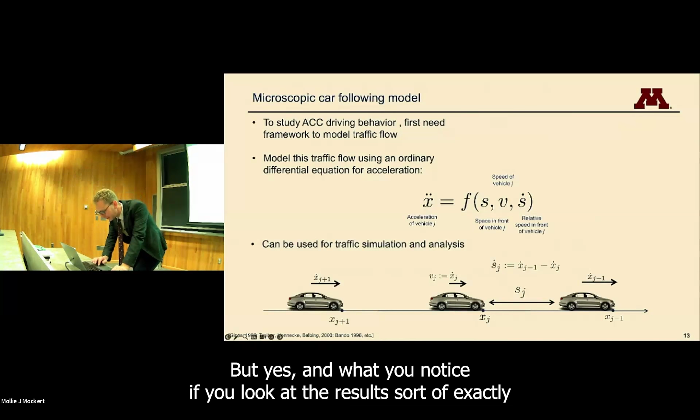What you notice if you look at the results is that there are 2 different values, A min and A max, for vehicle A, for example. A min is following at the closest spacing - so instead of following the 2-second rule, that driver is following the 1.4-second rule. With the 1.4-second rule, you have a much bigger lambda 2 than when that same vehicle, same engine and everything, drives at the maximum setting and follows the 2.8-second rule. Generally you see those disturbances propagate less or take longer to grow when you have a lower lambda 2. It's not quite that cut and dry, but generally speaking, yes.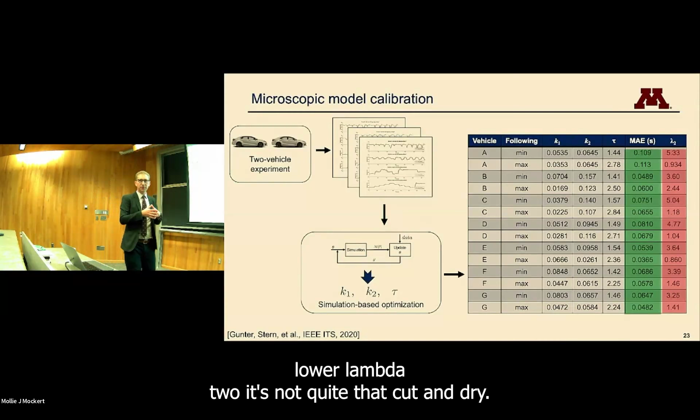Keep in mind, though, from a capacity standpoint, it's not quite that obvious that one vehicle is worse than the other, because if the vehicles are spaced twice as far apart, you can now fit half as many vehicles on the road at equilibrium. So it's not quite a one-to-one correlation between being more string stable and being better for flow. Ideal for stability is only letting one vehicle drive at a time, which is obviously not optimal from a flow perspective, but it's good from a stability perspective.

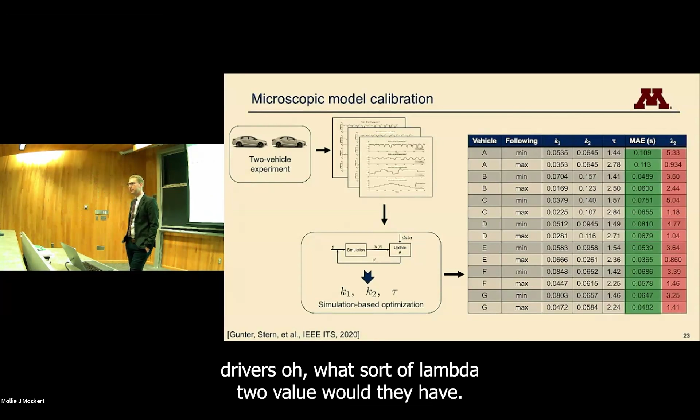Okay, I have a second part to the question - if you take human drivers, what sort of lambda 2 value would they have? Would they have a positive one? Is there any individual that has a negative lambda 2? Yes, it seems to be pretty hard to achieve.

Some drivers at certain times can be exhibiting string stable behavior. Some drivers might always be string stable.

Truckers are generally the best, and that's because they sit slightly higher. I don't believe your car has a very high vantage point, it has a relatively low one. So if you're higher up, it's kind of cheating, but it's almost like connectivity. You have information about the flow further up, and information about what's going to hit you in a minute. It's almost like low-tech connectivity.

What you'll see truckers do, and this is very common, there's this guy on YouTube, he lives in the Seattle area, commutes, and explains his philosophy about driving. When I watch it, I'm like, you have summarized graduate level traffic flow theory in a 2-minute YouTube video. He films his commute and explains how it makes maybe 1 second difference in his arrival time, but he has no problem letting people cut in and leaving a slightly larger spacing or gap.

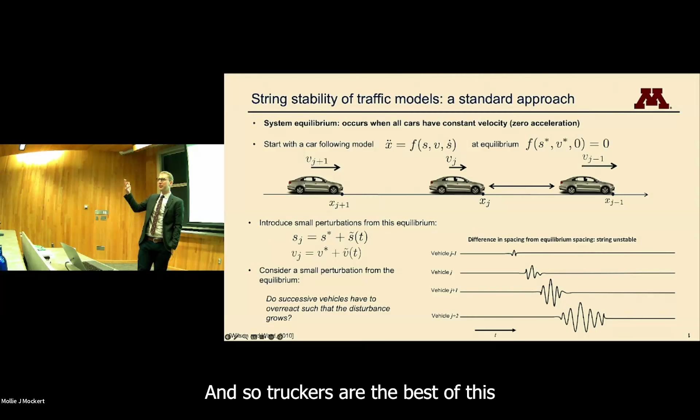Because he knows that's going to absorb these jams that would otherwise arise and amplify. Truckers are the best at this because they have that higher vantage point and can see when they need to leave extra spacing. For truckers, braking has a particularly high penalty because a lot of fuel is needed to accelerate again. So they'd rather coast, and they see what the speed of that wave is, and know that if they drive a little slower, they'll hit that wave right as it dissipates, and be uninterrupted.

So yeah, you absolutely can, and I urge everyone to do that - drive a little less aggressively.

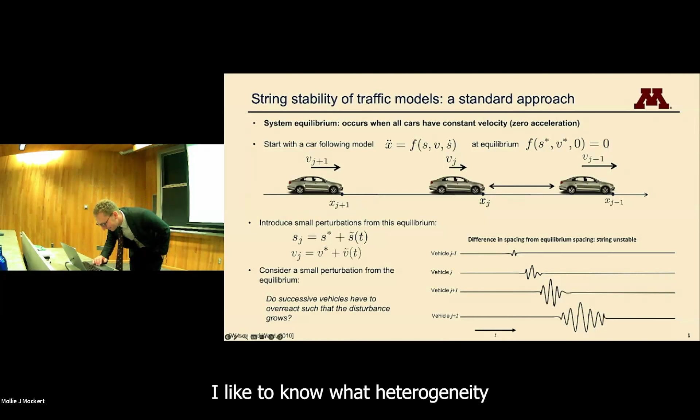I'd like to know what heterogeneity is captured among different classes - like what characteristics of different classes are captured, like jam density, speed, and most importantly, whether overtaking is allowed in the model. Yes, overtaking is allowed. That's fine.

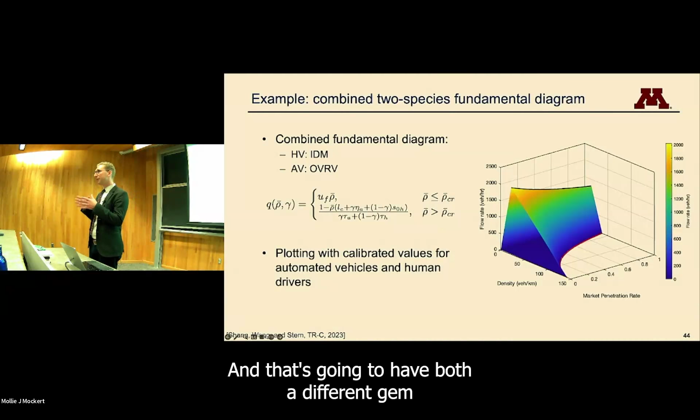Actually hold on a second, I'd have to double check on that specifically about overtaking. But basically what we're doing is assuming those models that we calibrated before. So we're using an IDM, an intelligent driver model, which is a very commonly used car following model for human drivers that lots of people have spent lots of time finding the right parameter values. That's going to have both a different jam density, but also a different fundamental diagram - if you take the microscopic model to the limit versus the model we developed here, it's going to be very different. Same free flow speed, different jam density, different capacity, because in free flow they're in free flow. But also different curvature to that congested region of the fundamental diagram. So fundamentally, in principle, different models.

I don't believe overtaking is allowed in that CTM, but I'd have to double check. I don't believe it is.

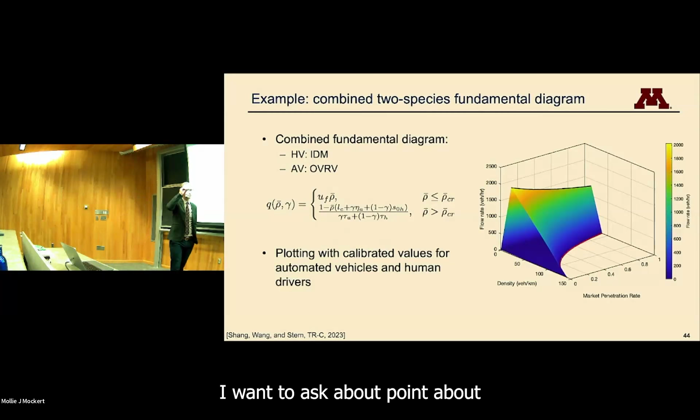So with the ACC, I'm going to say this sarcastically - it seems like those are designed by my grandmother, who is super cautious and wants to make sure you don't get in an accident. So actually, if I caught this correctly, just a yes or no - they're worse than the average human? Yes, okay.

So it depends on what you're defining as worse, but yes - I want to be really careful here - less optimal for traffic flow.

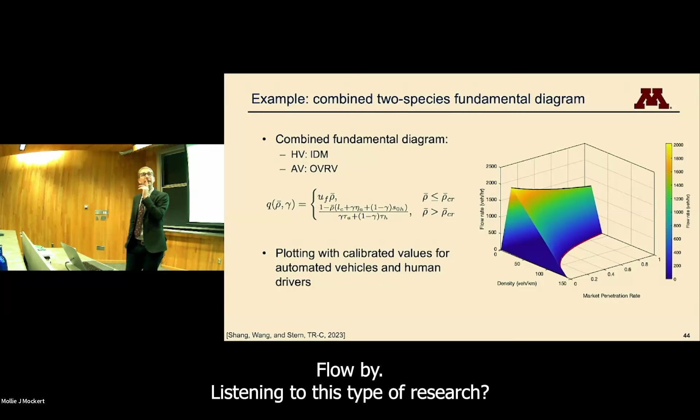Yes, I think. Okay, you talked about how the car companies won't talk to you - will they listen to you? Is there any interest on the part of car companies to actually improve traffic flow by listening to this type of research? Yes, I would be disingenuous if I said no. They certainly - I have worked with Ford before on something where they were trying to show a big demonstration. It was really cool.

They brought me out to Michigan to their proving grounds right before I started here that summer, and they tested a bunch of different things. They are definitely interested early on, so they definitely took these things into account. If you look at the people who worked there early on and the people they worked with...

I'm glad you brought this up because it's something I didn't say, and that is that I don't blame the car companies. They are selling things that are safe. Talk to Professor Davis if you want more information on that, but they're generally safe and comfortable. People want to use them.

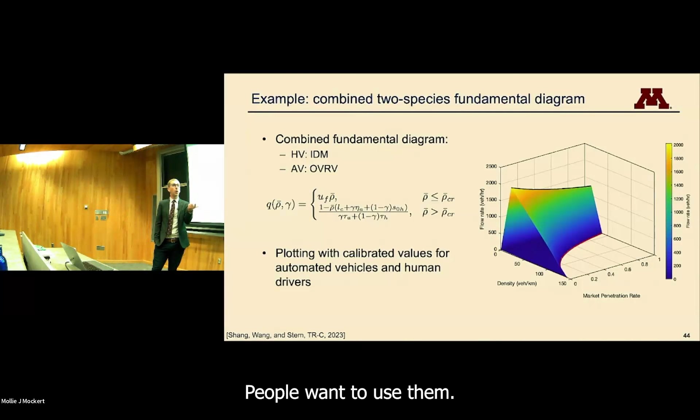One way to be better would be to be more aggressive, right? But that would be very jerky and perhaps uncomfortable for the occupants. So I think if you look at what they're trying to optimize, they're trying to make sure that they sell a product that's safe.

All these systems are safe, and then they're trying to sell a system that people want to buy. The biggest complaint, and if you look at newer systems they're better at this, is that they tend to leave too long of a headway. The number one reason, anecdotally, when I talk to people, they say, oh, I don't like ACC because it leaves too big of a gap and people cut in front of me.

That's a valid criticism. Part of that is because of what they're trying to do. They're trying to sell a really, really sophisticated automated vehicle without taking the sticker price up by maybe $1,000 or $2,000.

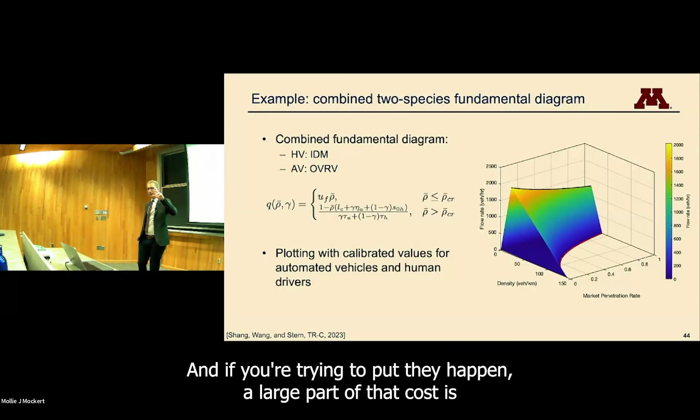A large part of that cost is all the sensors, which have very low latency and are able to detect when the vehicle in front of you brakes almost immediately. But that's obviously never going to work to put, I don't know, $150,000 even $20,000 worth of sensors on a car that you're trying to sell for $40,000 - it's just not going to work.

So car companies have generally bet on really low cost sensors like radar, which are only a few dollars to install, but then have big latency because it's a really low quality signal. So you have to do a lot of filtering to make sure that yeah, that was in fact the car that was braking in front of me and not, I don't know, a pigeon that flew in front of me or something.

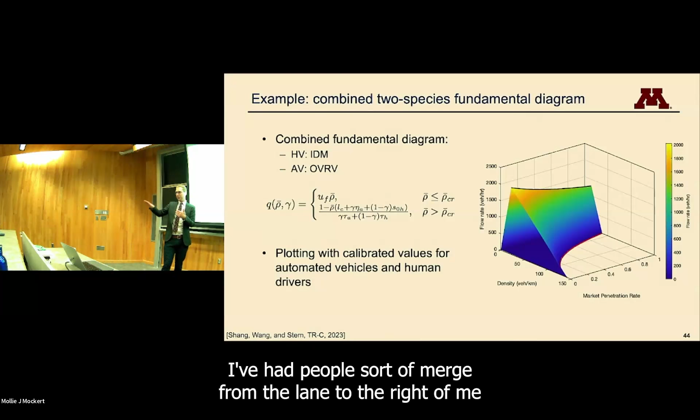Anecdotally, when I've driven these things, I've had people merge from the lane to the right of me through to the lane to the left, and my car doesn't even react. I'm guessing it's because it's still filtering - it's looking at a point cloud in front of it, and it's still trying to decide, is that a car in front of me, or is that just a sensor error?

Because you don't want it to be overreactive, because then it's going to start braking at things that aren't really there. So I think the reason we have the systems we do is part of an artifact of them trying to do a whole lot with a really low budget. As a result, they can't really afford to put those high quality LiDAR sensors on these vehicles. If you look at Tesla, they've taken a totally different approach.

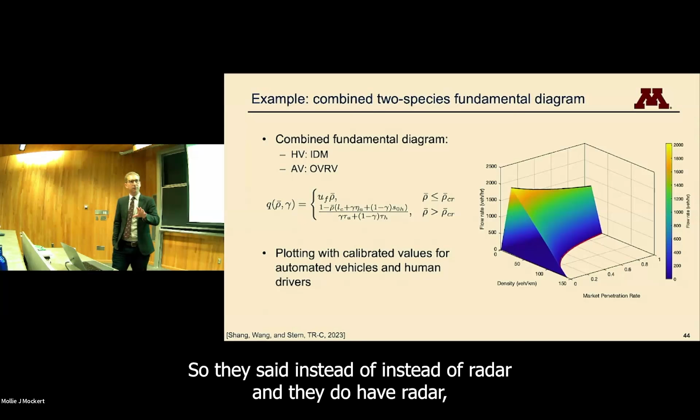Instead of radar - I mean, they do have radar - their focus is cameras, because cameras are cheap. If they put enough cameras on the car and put enough GPU or compute power in the car, they can get close to a LiDAR, that really high quality laser scanner, at a fraction of the cost. And they've been pretty successful with it.

So if you look at the way those vehicles drive, they do drive differently. And they are much less - I don't know your grandma - but much less like what I would imagine my grandmother drove like, right?